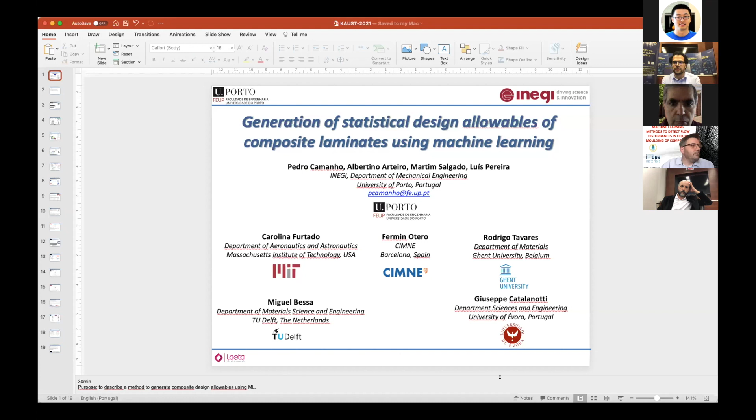So now it's the time to move to the fourth speaker. So it's the fourth and last speaker in this session, who's Professor Pedro Camanho, a professor at the Department of Mechanical Engineering at the University of Porto in Portugal since 2014, and currently he is the president of the Associate Laboratory in Energy, Transportation and Aeronautics and the Vice-President of INEGI Institute in Portugal. He will give us a talk on the generation of statistical design allowables of composite laminates using machine learning. So it's machine learning again. And yeah, the mic is for you, Professor Pedro.

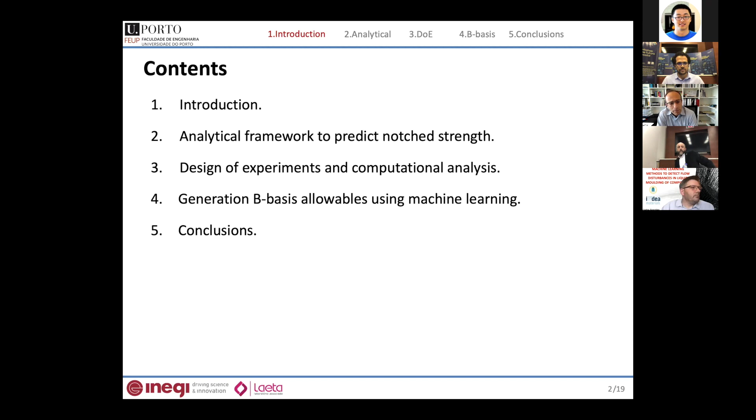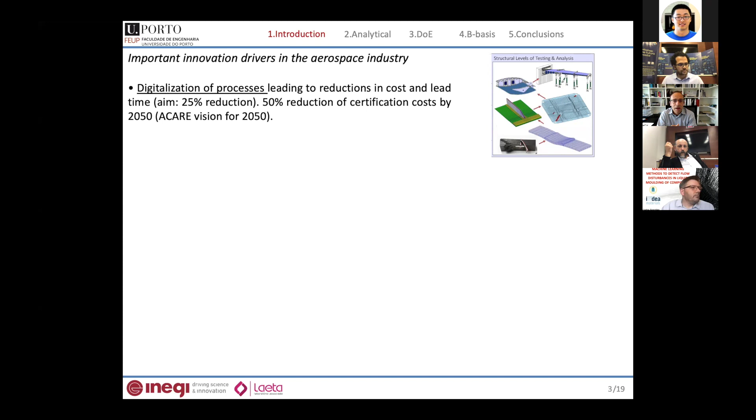So I'd like to describe some of the important innovation drivers in the aerospace industry. And the first one is, of course, digitalization of processes with the potential to lead to reductions in cost and lead time. So Airbus' goal is 25% reduction of lead time and cost in the design and certification of new aircraft. And if you look at ACARE's vision for 2050, the goal is to reduce the certification costs by 50% in 2050. So that, of course, requires digital twins, end-to-end simulation. Also, uncertainty quantification and management is of paramount importance as well.

And I'd like to quote a sentence from a keynote presentation given by Michel Fouinneteau from Airbus back in 2017, where he stated that today's simulations are providing a single result. In front of the authorities, we wish to provide an envelope of uncertainty associated to the results accounting for variations of specimens. And that requires, of course, a large number of computations. Also, in aircraft design, often we have a process of incremental development. So a given design is being challenged, and we need really to optimize as much as possible the composite structures. And that means, again, that we need to have this interaction between structural analysis codes and optimization codes.

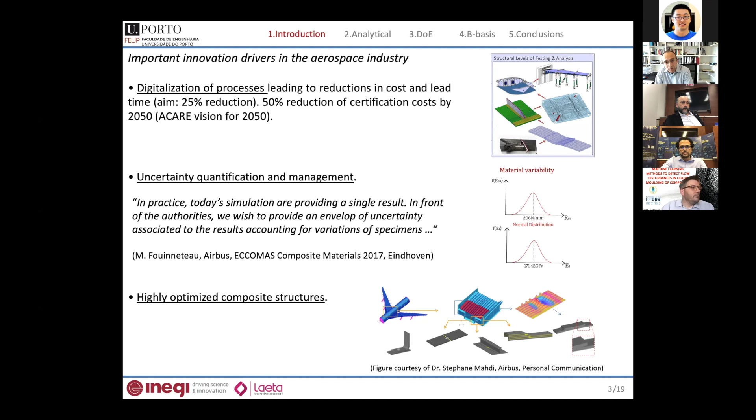So in order to tackle these innovation drivers, we have been developing throughout the years robust and validated models, so basically nonlinear finite element models that were used in a number of cases to predict the strength of, for example, open hole tension or compression, bolted joints, both for in-plane and pull-through, low velocity impact and compression after impact, low velocity edge impact and compression after edge impact. For example, here, lightning strikes, you can see the damage caused by lightning strike in a composite structure, all the way to the compression after impact of large stiffened panels.

Now, the problem with these models is that they are expensive. So they are expensive from a computational point of view. So these models can take something between 2 hours and 80 hours to provide one result, and also expensive in the sense that we need expert users, so engineers that are trained in computational fracture mechanics, which means that these high computational costs may limit the use of models. So our approach to this problem is to use these models that we have developed in the past to generate the data, and then from that data we create surrogate models that then can be used for optimization and for uncertainty quantification and management, because then we can perform a large amount of predictions with a very low cost.

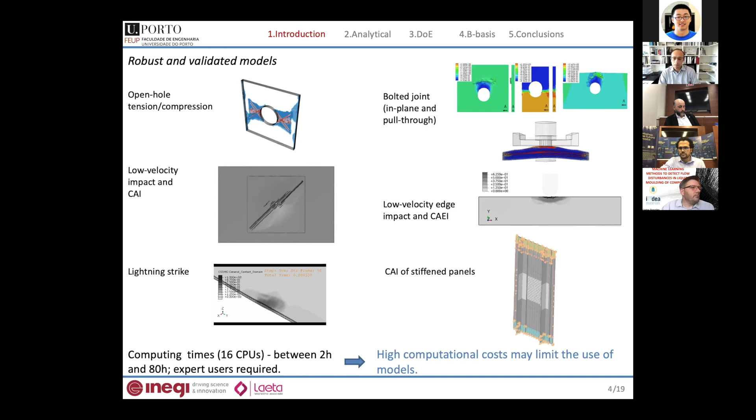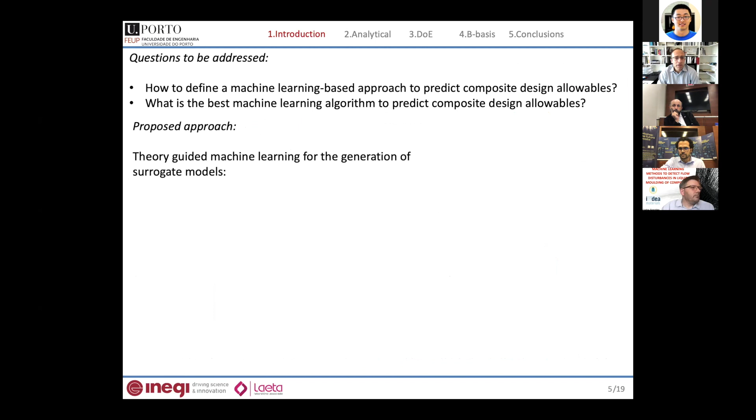But before doing that, we have to answer two main questions, and the questions are: first, how to define a machine learning based approach to predict composite design allowables, and second one is what is the best machine learning algorithm. There are several to choose from to predict composite design allowables. So this is what we'll try to answer in this presentation. And our approach is based on what is called theory-guided machine learning for the generation of surrogate models.

So if we plot the relation between data and scientific knowledge, of course, data science models have a huge amount of data available, but they don't require scientific knowledge. And what we have been doing for most of our professional lives is to develop physical models that incorporate a lot of scientific knowledge, but are based on a small amount of data.

So what we want to do is really to anchor the data science models with the physical models using theory-guided data science models. And we do that in two ways. The first one is what I've just mentioned: the data will be created by robust and validated physical models. But also, when we are developing the machine learning algorithms, we need to make sure that the results are acceptable from a physical point of view.

For example, we do not generate data that from a thermodynamic point of view or from a material point of view cannot exist. So this is something that we have to keep in mind. So we anchor the data science models with the physical models. So the approach that we propose is based on three building blocks.

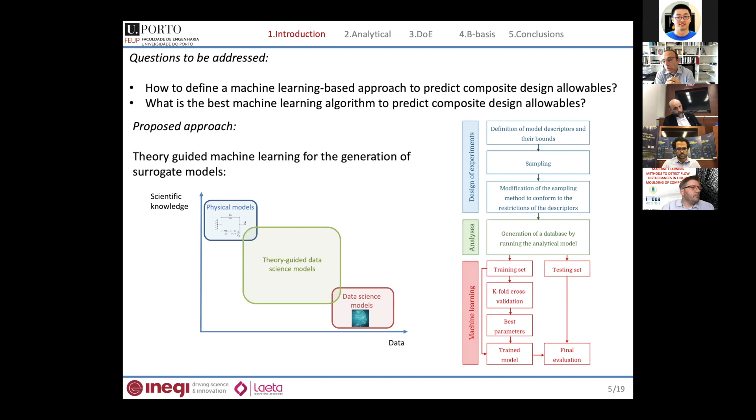The first one is the design of experiments. We have to define what are the model descriptors and the corresponding bounds. We have, of course, to perform the sampling. And again, coming back to what I just said, and you'll see this in the presentation, we have to modify the sampling method to conform to the restrictions of the descriptors, okay? So this is the design of experiments.

Then we perform the analysis and we create a database by running analytical models. Like I said, our goal is to be able to do this with the nonlinear finite element models. So what I'll present today is the generation of a database based on a semi-analytical model. It's not based on finite elements, because we want, at this stage, to have a large database that we can quickly generate.

So having this database, we can then move on to the machine learning part of the process. We generate a training set and a testing set. We do a k-fold validation to identify the best hyperparameters of the different machine learning algorithms that we have used. Then we end up with a trained model that we assess comparing with the testing set. So this is the proposed approach, and I will give you some information about the analytical model.

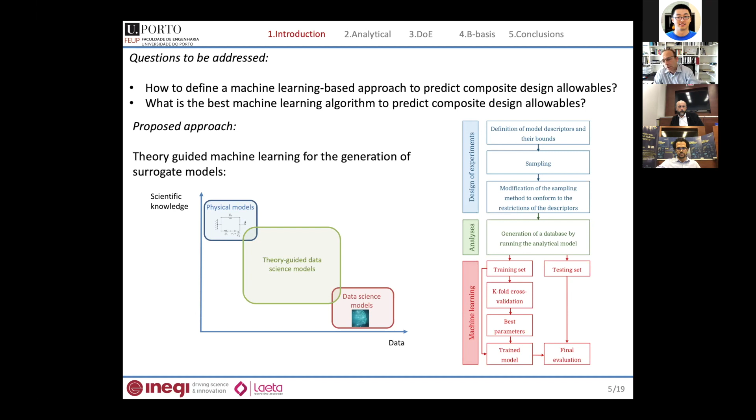So we are going to generate B-basis allowables for composite laminates with notches, okay? Of course we could solve this problem using nonlinear finite elements, but like I said, we're going to use a simplified model that we have developed and validated in the past that is based on finite fracture mechanics. So if we take a composite laminate with a notch, we have a notch geometry that is represented by this parameter lambda, and we introduce this non-dimensional variable gamma.

So we predict strength when these coupled criteria, a stress-based criterion and an energy-based criterion, the system of equations, are satisfied. And like I said, we don't need finite elements to solve this because we can get the stress distribution from Lekhnitskii, and we can get the stress intensity factors from closed-form solutions that are available in the literature for quasi-isotropic laminates. So we can plug in the stress distribution in the first equation and the stress intensity factor. Then we have material parameters on the right-hand side of these equations, and we can solve the system for the strength.

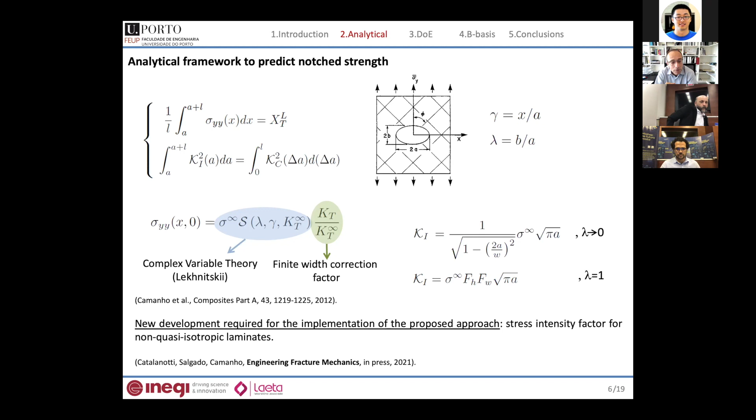Now, the thing that we have to keep in mind is that when we are using machine learning and sampling our design space, we may end up with non-quasi-isotropic laminates, and these solutions are only valid for quasi-isotropic laminates. So one additional step that we had to perform was to determine solutions for the stress intensity factor for non-quasi-isotropic laminates, and this was done recently in collaboration again with Giuseppe Catalanotti, and we have a paper in press that shows how we can obtain these solutions for non-quasi-isotropic laminates.

So then we need to understand what are the parameters that we're going to use to define the sampling process. Coming back to the finite fracture mechanics equations that you can see here, we have, of course, the geometry, the hole diameter and the specimen width, used on the left-hand side of these equations. And we have two material properties: the unnotched strength of the laminate and the fracture toughness of the laminate. And of course, these change every time we change the layup, okay?

So in order to reduce our space of the parameters that define the model, in the past we have developed a method that uses only three material properties. So basically what we do is to use the approach that was initially proposed by Steve Tsai, based on the concept of trace, or trace modulus as it's called today. So having the Young's modulus in the longitudinal direction, we can obtain the remaining elastic properties, and from the layup we can obtain the elastic properties of the laminate that we need to use

in these equations. Also from Steve Tsai's work, we used the concept of omni-strain failure envelope to relate the strength of the 0-degree ply to that of a multidirectional laminate. And in the past, we have also developed some methods that relate the fracture toughness associated with a crack that propagates perpendicularly to the fiber direction to the fracture toughness of a multidirectional laminate.

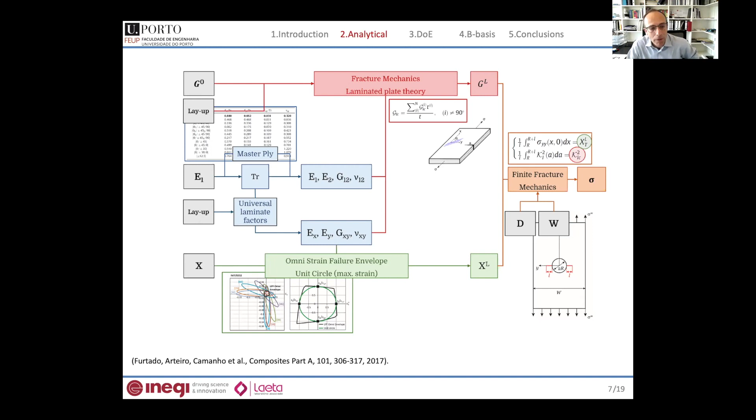So basically, we just need to know the three material properties: fracture toughness, Young's modulus in the fiber direction, and the strength, again longitudinal tensile strength in the fiber direction. We need to know the layup, and we need to know these two geometric parameters to feed our model, okay? But we have an issue here because the layup is something that we have to assess very carefully, because if we consider each ply orientation of a given stacking sequence as an input parameter, we'll have a huge dimensional space that would render machine learning unfeasible, okay? So we need to solve this problem before we use machine learning.

So the way that we solve this problem is to consider only two classes of laminates. The first one is what Steve Tsai named legacy quads, in the sense that we only use balanced symmetric laminates with only 0, plus or minus 45 and 90-degree fiber orientation angles. And then we use the double-double laminates, also proposed by Steve Tsai. If we do that, we'll see that for the legacy quads, we can use only two lamination parameters, zeta A1 and A2, to define our laminates, okay?

The other thing that we have to take into account is if we plot the normalized Young's modulus with respect to the two lamination parameters, we can see that they are not independent. So we have a region of feasible layups that we need to account for in the sampling process. If we use the double-double, again, we just have two fiber orientation angles to define our laminate. And if we relate the normalized Young's modulus with the two fiber orientation angles, we can see that our space is symmetric with respect to this diagonal line. So here we have to take into account restrictions, and here we can take advantage of this symmetry.

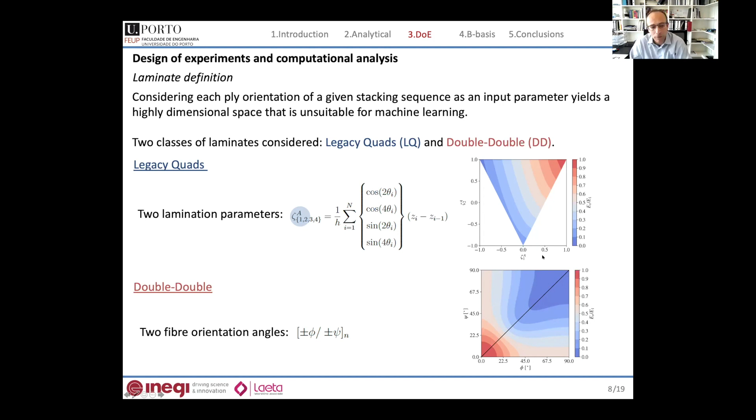Okay, so then we have to define the parameters that we're going to use in the sampling and then in the machine learning process. You can see that using finite fracture mechanics, we can predict the strength based on 7 parameters: Young's modulus, strength, fracture toughness, hole diameter, specimen width, and layup, which corresponds to 2 parameters. For the legacy quads, zeta1 and zeta2; for the double-double, the 2 fiber orientation angles.

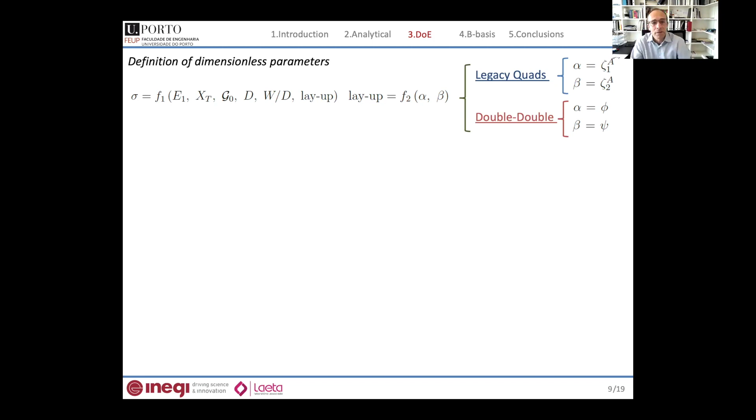But we want to do better than this because we still have 7 parameters, and of course that would require a large data set to properly train the model, okay? So we want to optimize this. We want to reduce as much as possible the number of parameters. So what we can do is very simple. We just use Buckingham's pi theorem, and we relate the normalized strength with only 4 parameters. So we are further reducing our sampling space or design space.

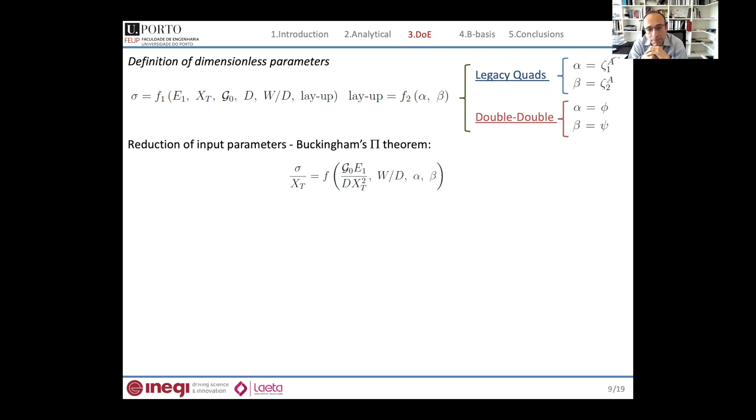So then we have to perform the design of experiments. We have implemented a Sobol sequence using a Python library, and we have here in this table the material, geometric, and laminate bounds. We have typical values for the relevant material properties. We have defined geometric bounds as well, and then these are the possible ranges that both the lamination parameters and the fiber orientation angles can take.

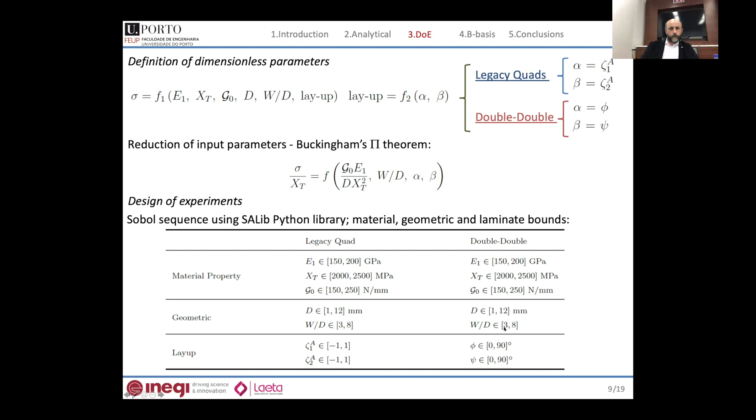Okay, so regarding the legacy quads, like I said, we have to take into account that we have a feasible region, and we have another problem to solve, which is the inverse problem. We need to identify a layup from the lamination parameters, and that can be done with some very complex optimization algorithms. But what we did was just to generate a database that relates lamination parameters with layups. We do that once, assuming that we have up to 32 plies, and then we just interrogate the database to relate lamination parameters with layups.

Then we have to take into account the restrictions, because, for example, if we generate these points outside the feasible region, we just ignore these points. And then the points that are inside the feasible region need, of course, to match feasible combinations of zeta1 and zeta2. So if they are within a given distance, we just move the sampling point to the nearest feasible point. So this is something that we have to take into account in the sampling process.

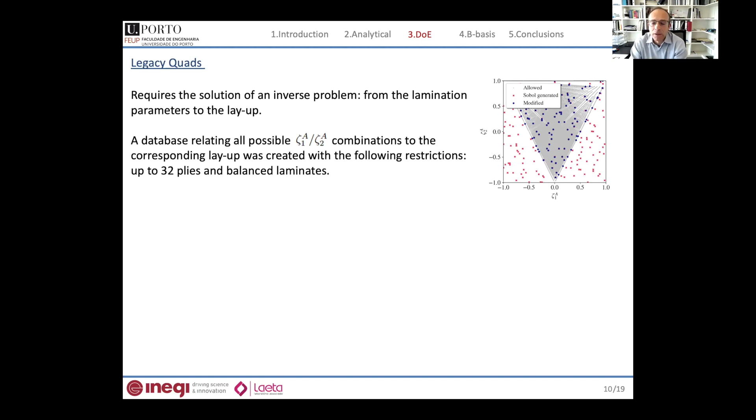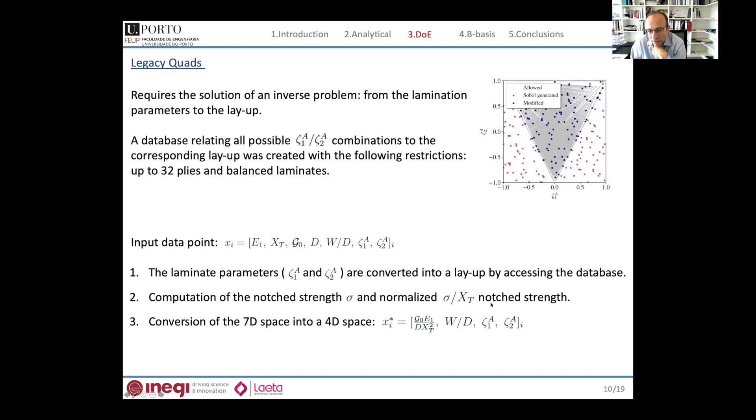And then we have an input data point with the seven parameters that define the model. So again, the procedure starts by converting the lamination parameters into a layup, accessing the database. Then we use an analytical model to compute the strength and the normalized notch strength. And then we convert the 7-dimensional space into a 4-dimensional space to train the model. So this is what we do for the legacy quads.

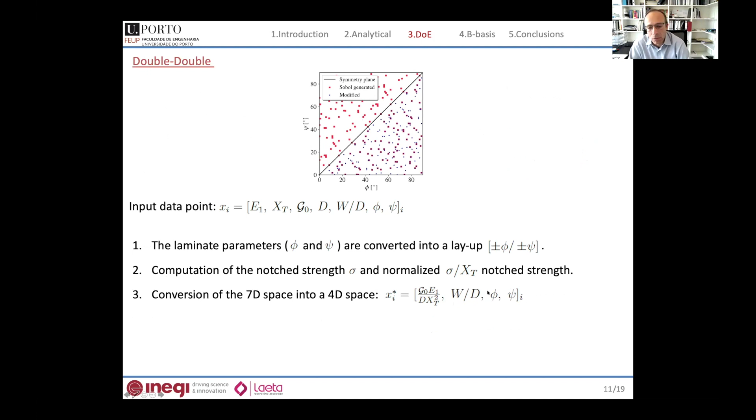And it's a similar procedure for the double-double. But in the double-double, like I said, we can take advantage of this symmetry in the sense that the Sobol points that are generated in this triangle, we reflect these points to this region here, which means that we can have a densely populated database that can be used to train the model. And then the procedure is the same. We get the laminate parameters, convert into a layup, compute the notch strength, and then we convert the spaces.

So we have used four algorithms: Gaussian processes, that are well suited for regression problems but are poorly scalable; artificial neural networks, that are scalable, able to deal with large data sets but are harder to tune; random forests; and XGBoost, which are fast learning processes, do not require data standardization, and the hyperparameters are easily tuned.

So what we did in terms of optimizing the hyperparameters for all the algorithms was to implement k-fold cross-validation, which consists of using just the training set and splitting it in k groups. Then for each group, we take one group as the test set and the others as the training set. We fit a model with a given set of hyperparameters to the training set and evaluate it in the test set that we have previously defined.

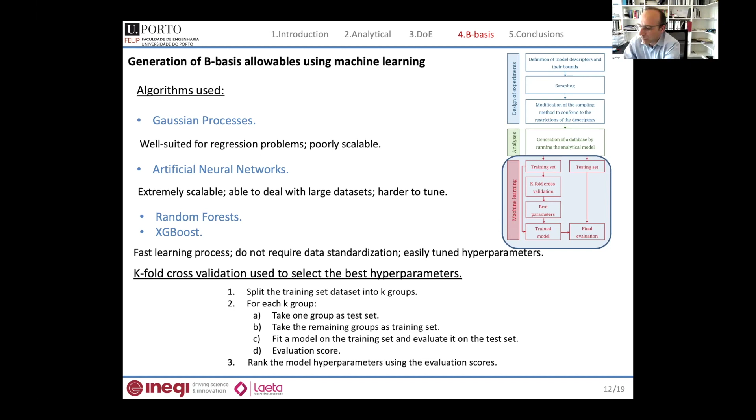And then we have an evaluation score, we rank the hyperparameters, and we repeat this process so that all the groups are at least once the test set. Then we identify the best hyperparameters. So we do this once to optimize the hyperparameters of all these algorithms, and then we are in conditions to do the final evaluation in the testing set.

We do this evaluation by performing these learning curves. The idea here is that, of course, data is expensive. This data that we have generated is not very expensive because it comes from a semi-analytical model, but if we are performing non-linear finite element models, or using test data, of course, that is expensive. So we want to understand what is the ideal size of the data set to generate the B-basis allowables.

So the other thing that we did was to represent the design space. We use 1,000 training points based on the previous conclusion and 9,000 testing points. And we have here for the legacy quads the relative error obtained by the different algorithms. And you can see that all of them are well within 10% bounds.

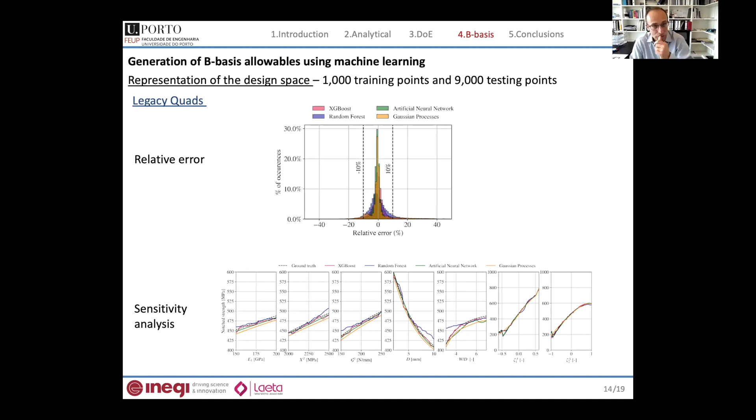So in terms of double-double, similar results. So the errors are well within the plus or minus 10% error for all the algorithms. Of course, you can see here that artificial neural networks and Gaussian processes outperform the other algorithms, and the same result here in terms of the sensitivity analysis.

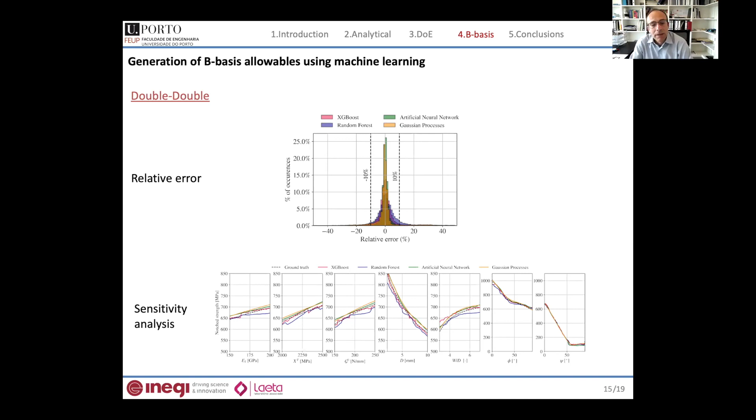Okay, so having tested our machine learning algorithms, we can then move on and generate B-basis allowables that are used in aircraft design. So just to recall, the B-basis allowable corresponds to the 95% lower confidence bound on the 10th percentile of a specified population. And it's a metric that accounts, of course, for geometric and material variabilities. So to generate B-basis allowables, we have used a Monte Carlo-based approach.

So we generate 10,000 material and geometric parameters following a given statistical distribution. So a uniform distribution in terms of the geometric parameters that account for variabilities of the machining process, and the normal distribution in terms of material properties. Then we calculate the distribution of notched strength using the analytical model and the trained machine learning algorithms. And then we calculate the 10th percentile of the distribution of the notched strength, and we take that as the B-basis value.

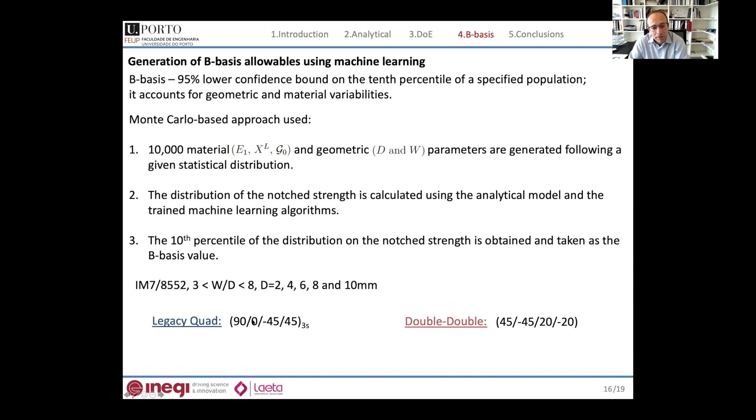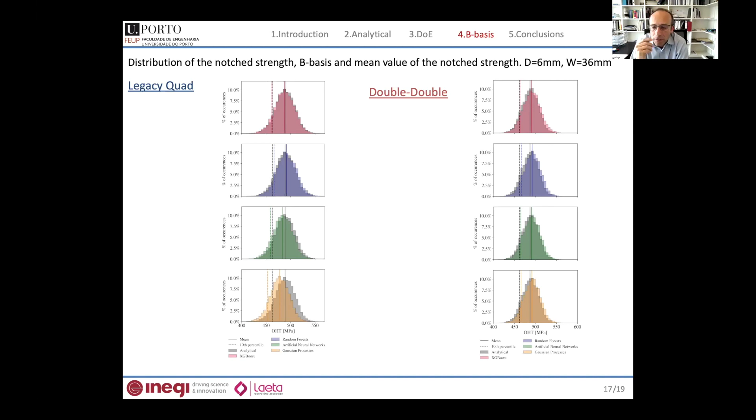So you can see both the distribution, and here you can see the mean value, and here the dashed line corresponds to the B-basis allowable that is used in aircraft design. And you can see that all the algorithms that we have used perform very well, both in terms of capturing the distribution and, of course, then in terms of capturing the mean value and the B-basis allowable.

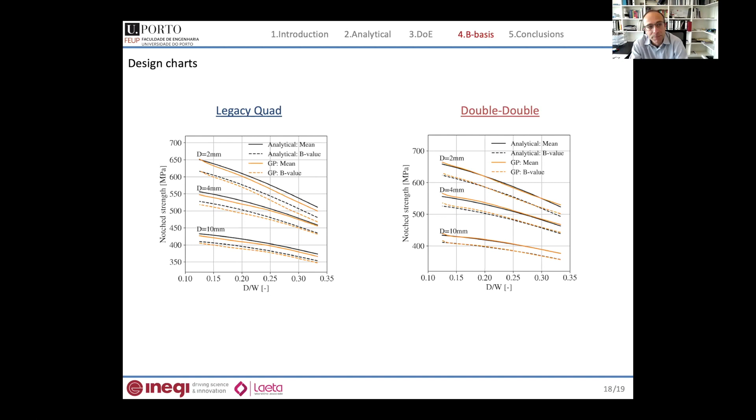And of course, this is one example for a given material or for a given layup, but we have now the surrogates that can be used for a whole family of materials and layups as well. Okay, so to conclude my talk, I think that I've demonstrated that using analysis models and restrictions in the definition of layups, it is possible to define machine learning models to predict notched strength of composite laminates.

We need really to understand these restrictions in terms of the layups and the problems associated with the high dimensional space that we have if we don't use, in this case, either legacy quads or double-double laminates. We've seen that the Gaussian processes achieved best performance for a small number of data points. Artificial neural networks outperform all other algorithms for larger data sets. All machine learning models provided good estimations of B-basis design allowables.

Based on our study, we think that Gaussian processes should be selected and preferred over other machine learning models. Take into account that first we have a continuous and accurate representation of design space. We get low errors in the predictions. We've seen a fast learning process. We have a low number of hyperparameters to optimize, and we have the best performance for small training sets.

So if you're interested in this work, you have more information in this paper that was recently accepted for publication in the International Journal of Solids and Structures, where all the details of what I've presented are available. What we are currently doing is to extend this methodology, but with data generated from nonlinear finite element simulations, and that requires some additional studies, but the overall framework shouldn't change.

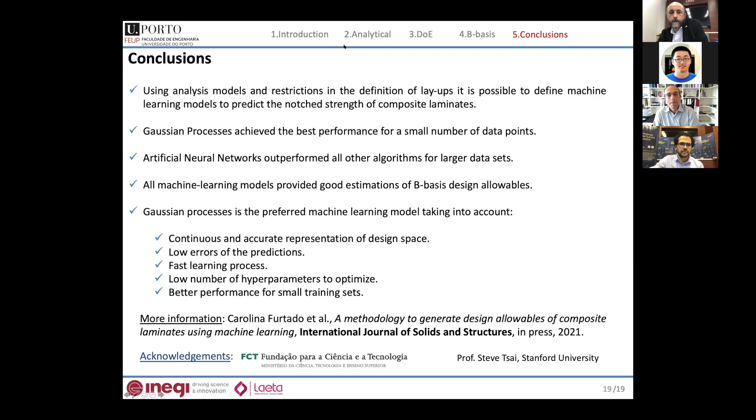I have a question about the overall strategy. Since you analyze a little bit the structure of your data by doing a Sobol analysis of your system, you get more ideas about the structure of your data. Can you use this to design or to give a specific structure to your neural network? Because there is probably a correlation between the type of network that you can use and the structure of the data when you make the Sobol analysis. No?

Well, that's a good point. We tried other sampling processes like Latin hypercube, but we didn't relate the sampling process with the different machine learning algorithms. What we have observed is that the different sampling methods that we used provided the same performance for all the machine learning algorithms. So there was not a clear relation between the performance of machine learning algorithms and the sampling process that we used.

So at the end, in the presentation and also in all the results, we decided to use just Sobol as the sampling process. Maybe there's a relation, but for this particular case, we didn't observe any correlation between the sampling process and the machine learning algorithm that we eventually use.